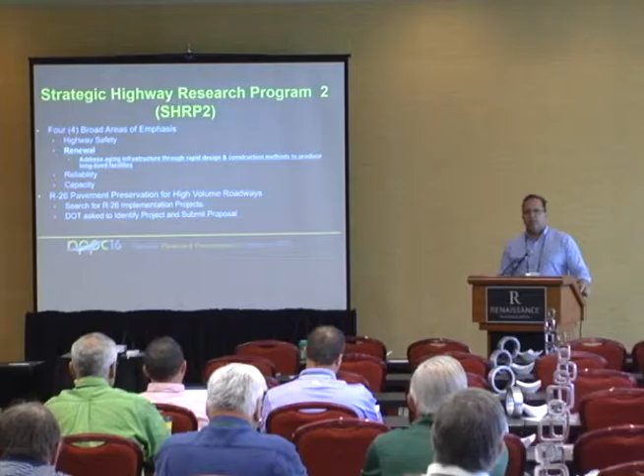All right, most of you will notice that my title is not the same as it is in the program. Really, we were going to talk about our experience with SHRP2. So that's pretty much what my presentation's about. It does involve UTBOs and fog seals, so kind of good with that. All right, just to give people an overview, how many of you are familiar with SHRP2 R26? Well, that's a high percentage.

All right, so basically it was part of the Strategic Highway Research Program, the second part. And there were 4 broad areas of emphasis under SHRP2. There was highway safety, there was renewal, there was reliability, and there was capacity. R26 was part of obviously the renewal. It's pavement preservation for high volume roadways.

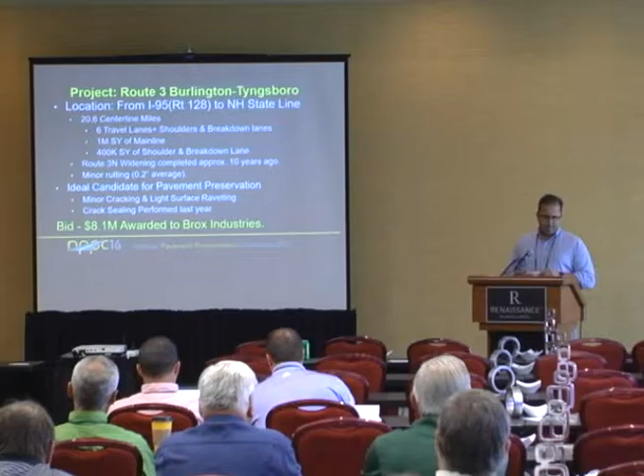And I got involved when I was invited to a meeting to talk about this. And the DOT asked me to identify some preservation projects. And I love preservation, but the first thing I said was, by the time we do all the environmental work and the stormwater work and the bridge water work, there's very little money left over for preservation. So the environmental director said to me, Ed, we can probably waive it for a project. What were you thinking? And I said, maybe a couple miles here or there. Well, I got the waiver, so we went from 2 miles to 20, because we hate to let a good waiver go to waste.

So these are the basic preservation treatments for high volume roadways. It's a pretty comprehensive list, but we kind of focused on 3 of the treatments, and one of the treatments we used 3 times. So we spec'd crack sealing, we spec'd 3 different types of ultra-thin bonded overlays, and then we specified profile milling. And that seemed to be a pretty good selection of options.

So how do we actually pick our projects, or how did this project come along? Well, we basically use a Pathrunner automated vehicle for collecting pavement condition. And basically, we end up with a report that shows the condition, the video of the roadway, and there's a distress map. And we use the distress in our project selection matrix, where different distresses relate to different treatments. And you can see that UTBOs were pretty good candidates. They fell within the condition ratings that we needed for that type of work.

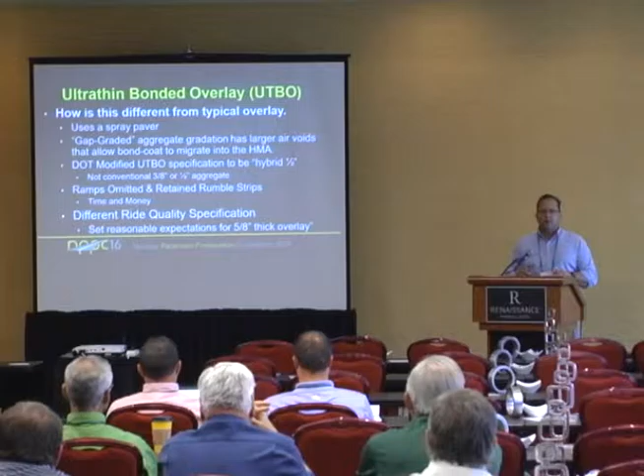And it was an interesting project because it was an ideal candidate for preservation. As you could see from the pictures, and you'll see more, there was light cracking and early raveling. We were losing some stones from the surface. There was end-of-load segregation from the prior work, and it really needed a treatment, and we had average ruts of about 0.2 of an inch. So we thought we could use a UTBO on it pretty safely without a lot of issues, without leveling, without a whole lot of milling.

So here were our demonstration treatments. Since we had about 20 miles of roadway, we thought we could try a few different types of UTBOs. We were a green DOT, so we were trying to put a green spin on some of this. So we decided to try a conventional 64-28 as kind of a conventional technology, and then we decided to use an asphalt rubber UTBO, which is a recycled technology. And then we decided to use a 64V-28, which is the new grading system, so polymer modified. We thought this would be a good way to compare how binders are impacting the different thin overlays.

Now, what was interesting about this project is it's 3 travel lanes in each direction, but it was widened about a decade ago. So there was a full breakdown lane and a full high-speed shoulder, and all the bridges were widened for even an additional lane. So we had over 400,000 square yards of shoulders. And we thought that's an opportunity to try something different.

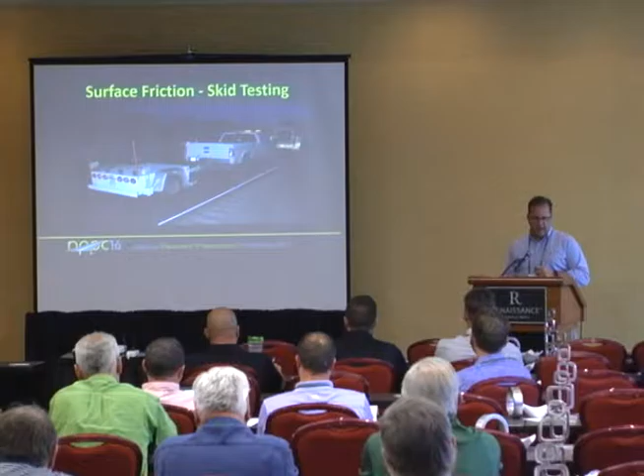And we tried 3 different fog seals: a CRS-2, which is just a conventional fog seal, not modified, a gilsonite, which is a GSB-88, and a CRS-2P, so just a polymer modified fog. And then we were looking at the shoulders and said, what are we going to do for friction, and do we need friction? Well, we wanted to look at different friction treatments as well. So we decided to use a high velocity shot blasting, and we also decided to try boiler slag. So we have a lot of different treatments going on, and we have different surface textures.

So all of this started getting a little confusing. So we put together just a chart, and you can see, so that's the 20-mile roadway. Segment 3, which is the conventional HMA, was the northerly 7 miles. The middle 7 miles were the asphalt rubber, UTBO, and the most southerly section was the polymer modified.

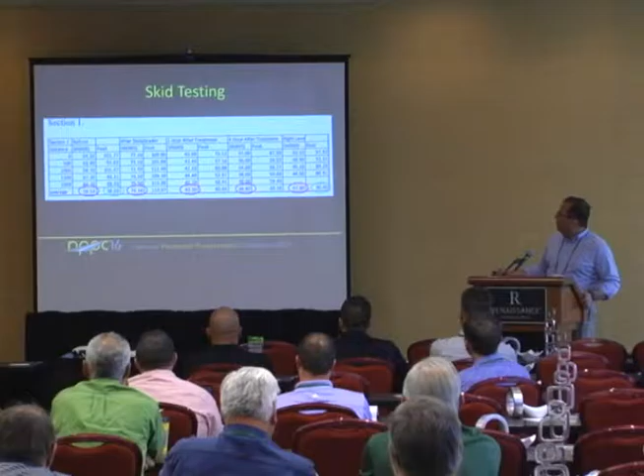So we got a lot of questions when we put this out. They said, oh, what is this? Have we ever used it before? No, we're going to do 20 miles worth of something that we've never seen before. That would be a really good idea. The UTBO, we had a few years of experience, but we explained to people that you need to use a spray paver. It's a standard HMA. It comes out of a hot mix asphalt plant, but it's a little different because it's gap graded. It gives a bond coat, a really heavy tack coat, room to move around, room to migrate into the mix.

And then I started talking to a few contractors, and we started getting some concerns, like, what are you going to use? You're going to use that 1/2 inch? You're going to use the 3/8? If you use the 3/8, we have to double screen it. It's going to cost you a lot more money. I don't want to do it. And then we looked at the gradations, and we determined that we were going to try and do a kind of a hybrid 1/2. So it's a finer 1/2 inch. Is that a hybrid 3/8 or a hybrid 1/2 inch? Basically, we were between a 1/2 inch and a 3/8 gradation.

We also omitted the ramps just for money savings and speed of construction. And we also determined that this should be a QA spec, a quality assurance-based specification, because Federal Highway was involved, and they thought that was a good idea, and they were paying, so we thought it was a good idea. So we modified the specifications a little.

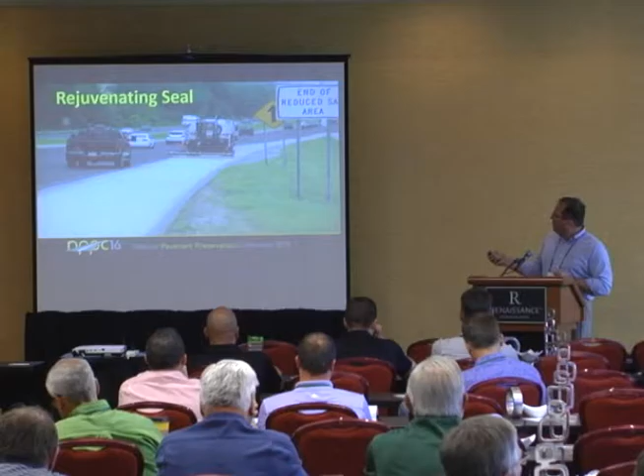So we modified our ride quality specification to make it a little bit more reasonable for a 5/8 or a 3/4 inch overlay. We didn't think you can get the same ride quality from a 5/8 inch overlay as you can from a 2-inch mill and fill. So we didn't have a whole lot of experience for what that number should be. So, how do you say, we winged it? We wung it.

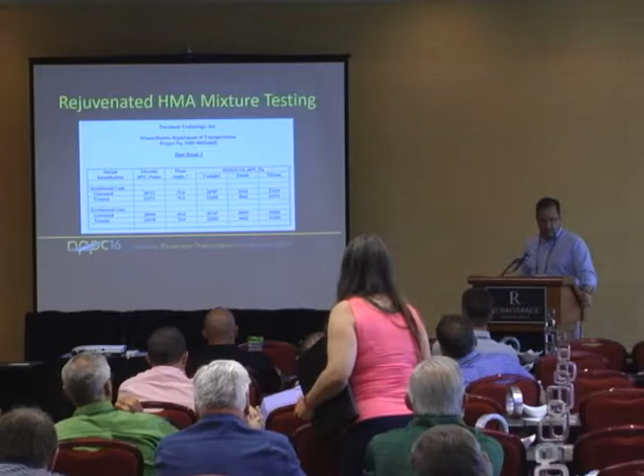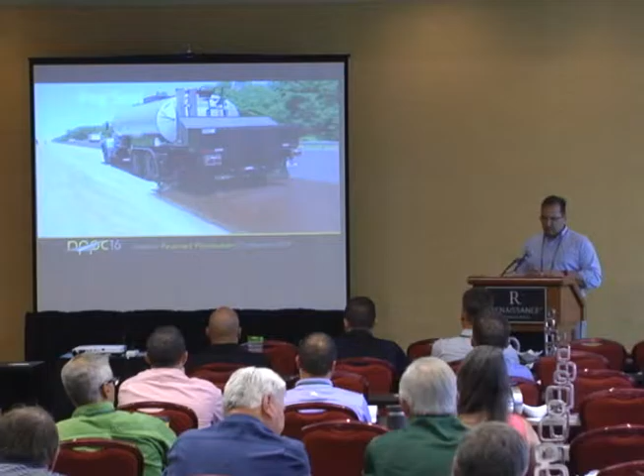So here's the roadway, and here's some of the things that were different. If you can see along the sides, we shimmed the shoulders so we could zero out at the fog line. I don't know if you guys can see that, but that meant we didn't have to replace the rumble strips, and we had a nice smooth transition from the UTBO to the shoulder. We thought that was important because we have a lot of plowing operations, some years 100 inches of snow. I didn't want to see any delamination or see the edges come up.

We also specified a 7-foot milling machine because we didn't want to see someone come in with a trimmer. We thought the edge milling would also help with the slight rutting that was there.

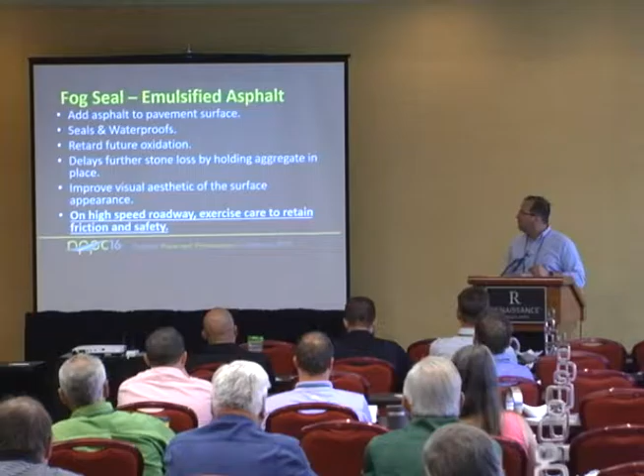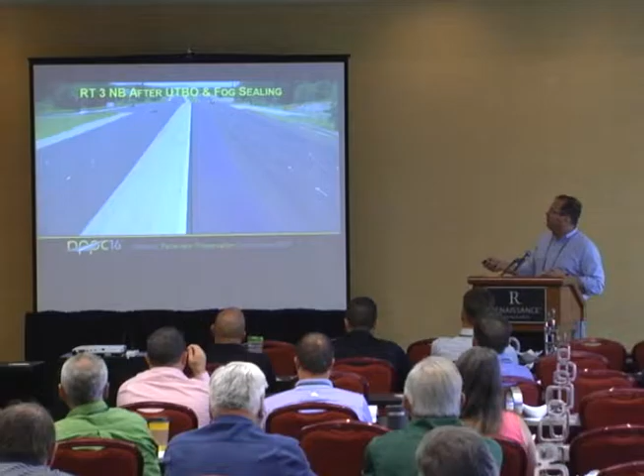When we put the contract out, we didn't have a really good detail for how to transition into the ramps without a lot of handwork, which with ultra-thin bonded overlays sometimes doesn't look that great. So we worked with the contractor to develop a detail, and you can see it here, where we transition milled the turning lane, and then a few hundred feet of the ramp. So this allowed the paving contractor to pull this pass and then come in and pull this pass, and it worked out really well.

How many of you have seen a spray paver before? All right, well then you know what this is. It's a spray paver. You can obviously see the tack that's sprayed down, the HMA. We like this. We liked how it held up. We liked how it worked. We liked that there was no tracking at all. And tracking has become a huge issue in the state.

And so I did want to talk about the shoulder treatments a little bit. Obviously, we've all seen the pictures. When we widened the roadway, it just created an awful lot of surface area. We didn't think the project would look complete if we didn't do something to the shoulders. So the fog seals were our choice.

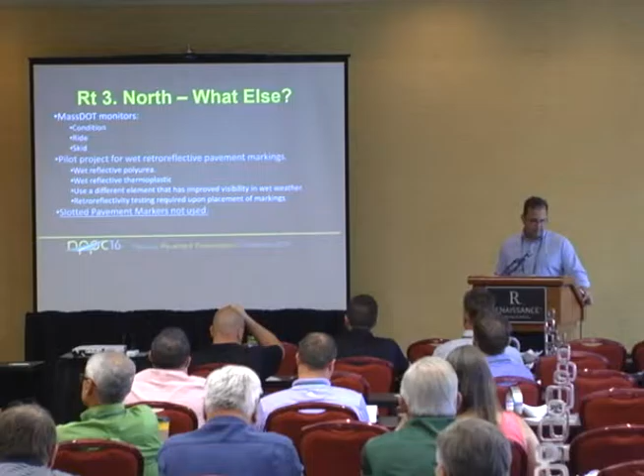A fog seal, and I think everyone here knows, is just a light application of a dilute asphalt emulsion to seal the existing surface. It's definitely a top-of-the-curve treatment, sprayed at 0.06 to 0.2 gallons a square yard, depending on what your surface is. And from our perspective, it was one of the most cost-effective preservation treatments. I don't think fog seals are appropriate for all roadways. We thought this is a good start to see where we could use it.

It's a very cost-effective treatment, but we did have to look at some of the challenges. I did want to mention the other fog seal that we used, the rejuvenating fog seal. Rejuvenators are oils that soften the existing binder and reduce its viscosity. This improves the flexibility of the binder. It reduces raveling and future loss of aggregate.

We believe it replaces the maltenes in the asphalt, and the dosage rate is something that's a little bit up in the air. We based our dosage rate on some field testing that we did; we tried to achieve a certain percentage of improvement in the viscosity.

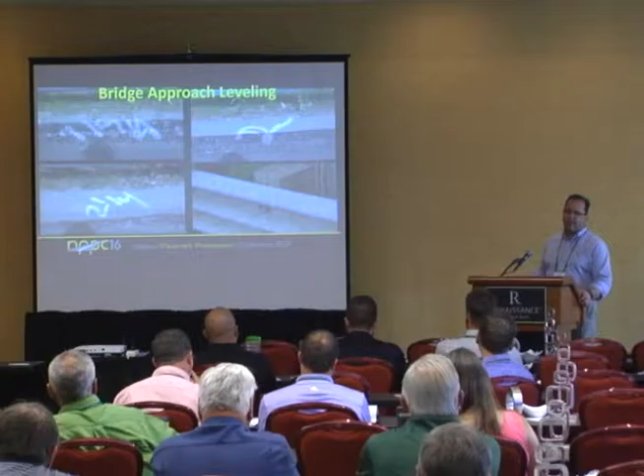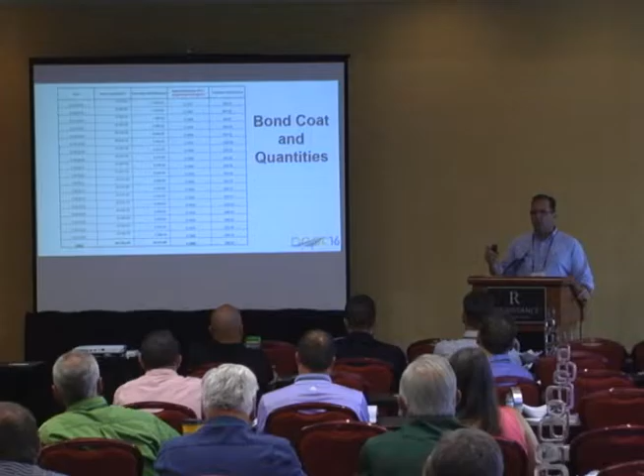And the right travel lane that was an actual travel lane was at 47. So a lot of these skid numbers were actually higher because it was the travel lane and there was no kind of polishing of the aggregate. So we did lose some friction. It did come back.

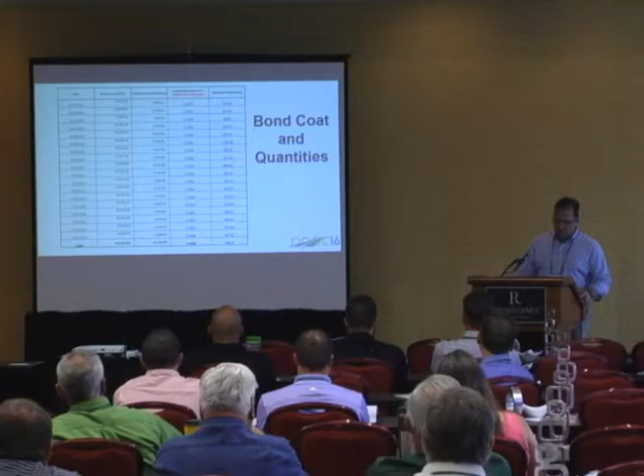Okay, so after we Skidabrated, and because it was a QC job, we asked them to verify that they were getting the surface texture that they were looking for. So we didn't require a skid tester to come out every night to verify the work because that's a lot of time, a lot of money. We found out that we could actually use a surface friction outflow meter to calculate surface texture.

And basically, how many of you have seen an outflow meter? Basically, it's a device that has a known quantity of water and a timer, and when you open up the valve, it releases the water, and the texture of the surface will let more or less water out. So we were looking for a certain improvement in outflow, and it seemed to relate to some degree to the openness. So that was a good way to QC the high velocity shot blasting.

Okay, so shooting the rejuvenating seal was interesting. We did have a few comments on the pink color, Colin. It was sprayed at a rate that was, Colin, do you remember the rate offhand? It's between 600 to 700 of a gallon per square yard. Okay, between 6 and 7 hundredths of a gallon per square yard.

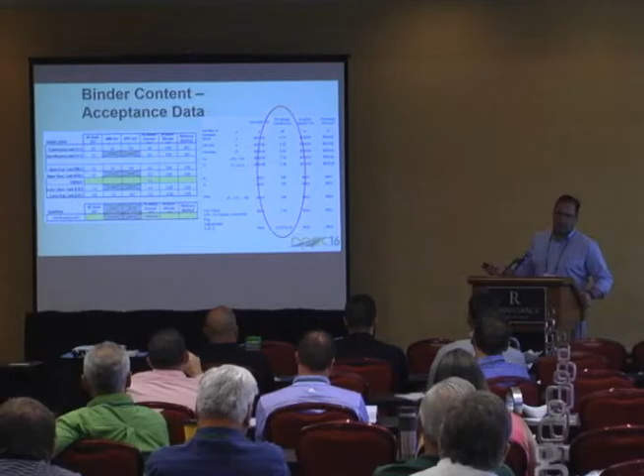We also fog sealed the high-speed shoulder. Half the fog seal was on a Skidabraded surface, and half the fog seal was with Black Beauty. The fog seal obviously adds asphalt to the pavement surface, so it seals and waterproofs. It retards future oxidation, makes the roadway look finished, and I'm not going to say that enough times. On high-speed roadways, exercise care to retain friction and safety. I know that we did. I just can't say that enough.

All right, so what else did we do? Obviously, it's a research project, so we're monitoring condition, ride, and skid. It was also a pilot project for wet reflective pavement markings. We used these slotted pavement markings that weren't really holding up, and we took this opportunity to do a pilot project with Federal Highways approval. So in one barrel, we used wet reflective polyurea, and in the other barrel, we used wet reflective thermo. By wet reflective, we used a different element that has improved visibility during wet weather.

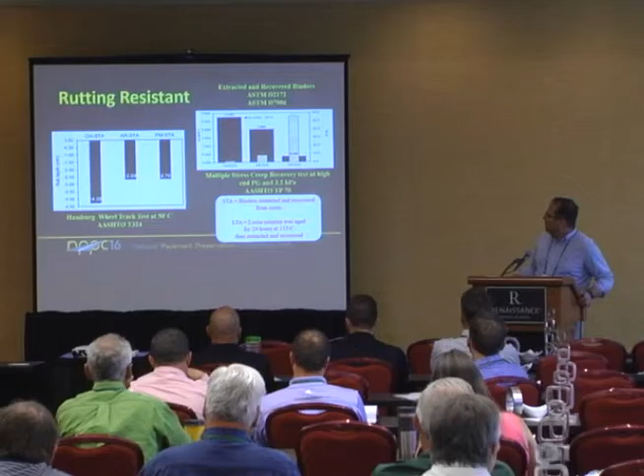They're also recessed, and it's something we didn't do on a lot of our projects, but we had a requirement for the contractor to come in and do dry and wet reflective testing on the striping, and it was definitely a good thing to have done, because I think on a lot of the projects when they go out, you don't get the visibility on the striping.

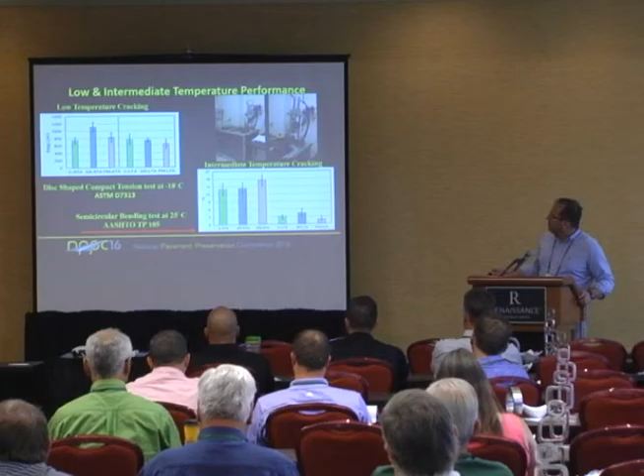This was one of the first jobs where we had required testing, we had a required testing frequency, and if the contractor couldn't meet the retroreflectivity requirements, we told him what he had to do about it, and he didn't want to have to do the striping over, so it put a nice finish on the roadway.

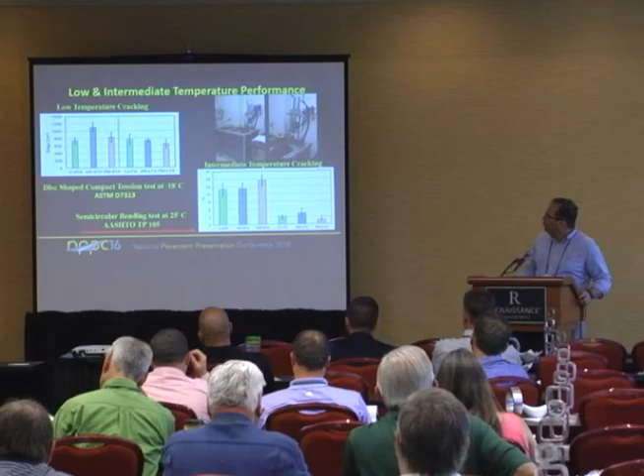Bid price was $8 million, all in with traffic control and everything. We were into it for about $9 million. As a mill and overlay, that would have probably been in the 30 mil range. Obviously, we would have gotten a few more years of service life, but one thing that was really unique about this project is I think there was 45, Alan, how many paving days? 47 paving days. The traveling public was absolutely impressed with how quickly the project went.

So economically, it worked. Environmentally, we ran some CO2 and some emissions numbers and some energy usage numbers. And we were looking at a 62 to 64% reduction in energy and CO2. That's annualized. I don't remember what manual I used to calculate it. I know I got it through one of these conferences.